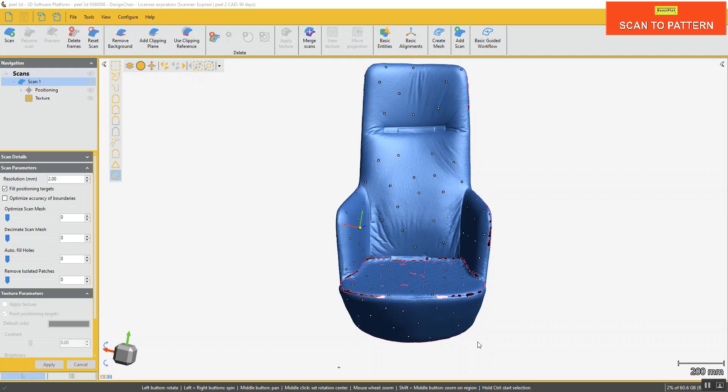Welcome to this video in which I'm going to show you how to take a scan from your peel scanner, send it over to your peel 2 CAD software, and then send that information over to your ExactFlat software.

So first of all, I have my scan here, but before I send it over to peel to CAD, I'm going to decimate my scan mesh, which is going to allow the smaller triangles to become larger in the areas where I don't need as much detail. In other words, the triangles are going to be larger and there will be fewer of them, which is going to reduce my file size by a lot.

Okay, so now that it's done, I am ready to send it over to my peel 2 CAD software. In fact, I can even delete my scans and then save this as a different name, underscore P2C for peel to CAD.

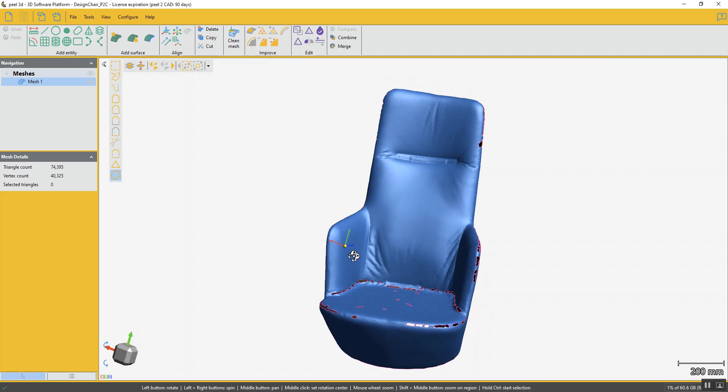Okay, now that I'm in my peel 2 CAD software, I'm going to first clean my mesh. This column is showing me all of the triangles that are affected by different things that I can fix, like spikes, narrow triangles, and creased edges.

If I'm ever not sure what any of these mean, I can click on the help section. The help section is very useful for when you are doing a certain action. Here I'm cleaning the mesh, and right here it is talking about different things on how to clean the mesh.

Okay, so I'll click on apply, and then OK. Next thing I'm going to do is fill in these holes, so I can click on fill holes. It looks like I have 52 holes that I can fill.

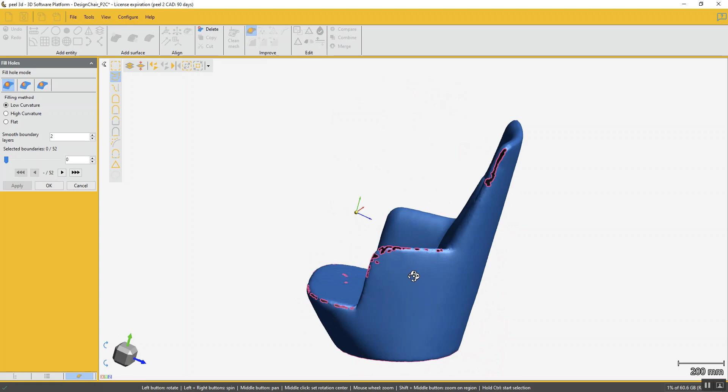Now, if I move the slider bar, it's going to fill in the smaller holes first, and those are indicated by the yellow holes. As I go higher and higher, I'm filling in more and more of the holes. I don't want to fill in the bottom one, because I'm going to be using that later for my alignment. So I'll just click on apply, and then OK.

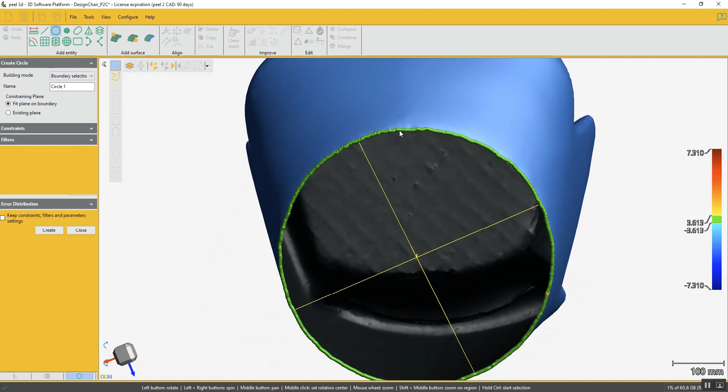All right, next thing I'm going to do is create a circle to use for my alignment. I'm going to use the building mode of boundary selection, and then I just click on the boundary or the edge of the scan, and I click on create.

Next, I click on plane to add my plane. I'm going to use triangle selection for my building mode, and then boundary selection for my selection tool. When I use boundary selection and click on that boundary, it highlights a row of triangles along that boundary, and those are the triangles I'm using to create this plane.

In other words, the circle is going to be on that same plane because that's how I made the circle using the boundary.

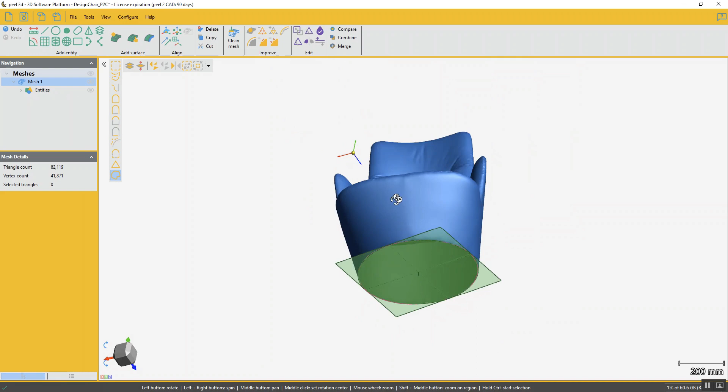All right, next thing I would do is create a line of symmetry or a plane of symmetry. I do that by going to plane, and my building mode this time is going to be mesh symmetry plane.

My options are to either choose plane 1, which doesn't really make sense here, or draw a line or pick 3 vertices. So I will draw a line approximately down the middle, but the software is going to do the rest of the calculations using the rest of my scan.

Okay, so that yellow plane is actually where my symmetry plane would be. I can click on create and then close.

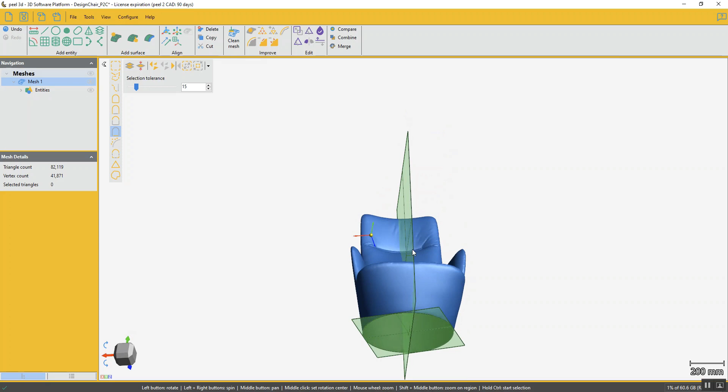All right, so now that I've made my circle and my 2 planes, I'm going to move my origin down to that bottom of the hole, and I do that by clicking on Align to Origin.

And then I restrict different entities. So my circle 1, I'm going to use as my origin XYZ. Then my plane 1, I'm going to use as my plane XY. And lastly, my plane 2, I'm going to constrain to my YZ plane.

Now, as you can see, my part is kind of upside down. I want my Z to be pointing the other way, so I can click on the flip button here under circle 1.

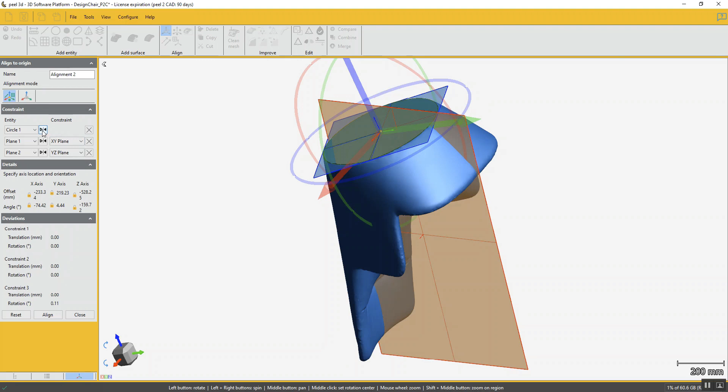Oh, and I can't actually, because that's the origin XYZ, but I can click my XY plane to flip that. And then my plane 2 to flip it the other way as well.

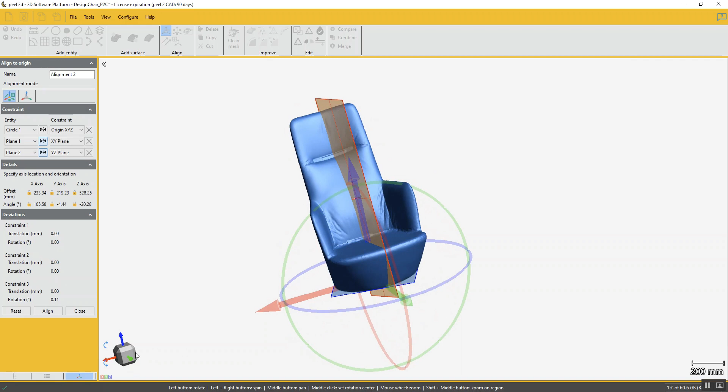Okay, so now at this point I can use my cube to be able to see different points of view, and that's going to be really useful for when I'm cleaning.

Alright, so at this point I'm ready to start cleaning my mesh a lot more. There are certain things that I know for sure I want to clean up, like I don't want this little indentation here. So I can use my rectangular selection, hold down the Control key, and click and drag. And then I click on Defeature. So that smooths that out there.

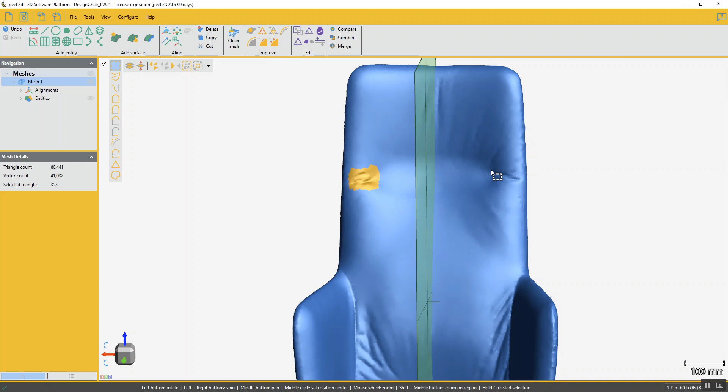But I still have little wrinkles here and there that I want to fix. So I can go bit by bit highlighting them everywhere. But keep in mind that the larger ones that you highlight, there's going to be a little bit more issues with taking a little bit more time. So you want to do them bit by bit.

Also, I don't know if you saw when I clicked on Defeature, it said irregularities were found within the selected part of the mesh. This is very common, especially when you have a blue triangle still hiding within your selected area. So to fix that, just click on the Grow Selection tool, and then you can shrink it again if you wish to. You click on Defeature again, and it works the second time.

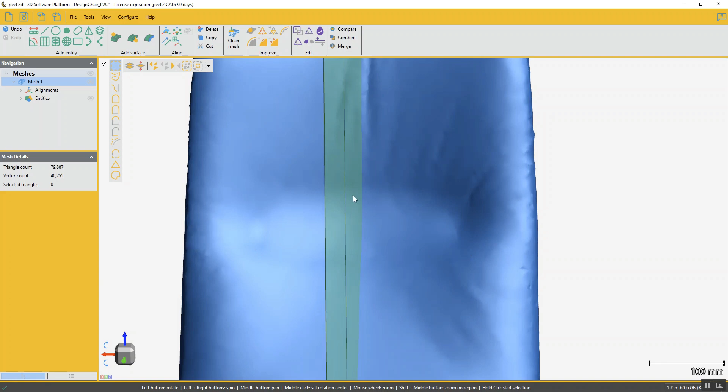So I'm going to go around highlighting different regions, just smoothing everything around here. Now you can either use the paintbrush selection tool, which is what I'm doing right now, or you can use the freeform selection tool.

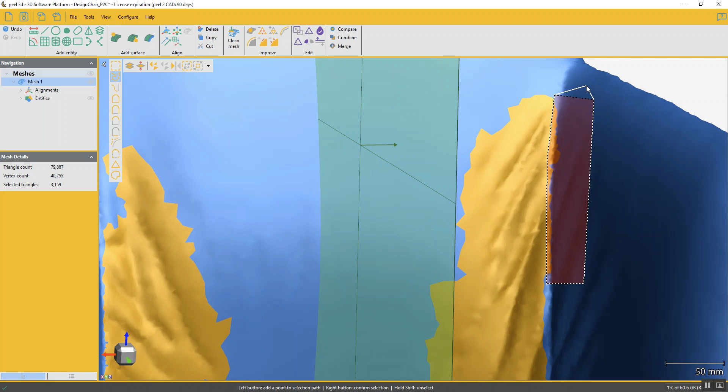I'm going to make sure I don't highlight my corner here, and I do that by hitting Control and Shift at the same time. While holding those down, I do my left click everywhere where I want to unselect. And before I let go of Control Shift, I do a right click. So I can hit Defeature, and it's much smoother there.

Another way to clean things up is by creating holes and then filling them in depending on their form. So in this case, I'm going to use the similar normal tool, and I'll click on this planar area of the bottom seat, and it says unable to create selection with current vertex. In order to allow it to select that region, I'm going to raise my tolerance up, and then it's selecting this region. The reason it wasn't selecting before was because it didn't consider it very planar-like until I eased the tolerance.

I still have some blue regions here that I'm also going to want to delete, so I can just grow that selection, and maybe just a few more just to make sure, and then I can shrink them back down.

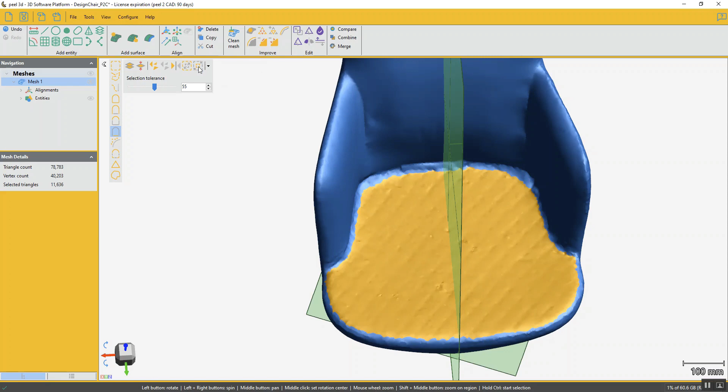Now in this case, I kind of just want to select the flat region, but I do even want to select it all the way back to the edge here. So for that, I'm going to use my freeform selection tool and highlight a little bit more around here. And it looks like I highlighted too much. I hit Control and Shift and just deselect once again. Right click.

And now I'm ready to delete. I can also hit delete on my keyboard as well.

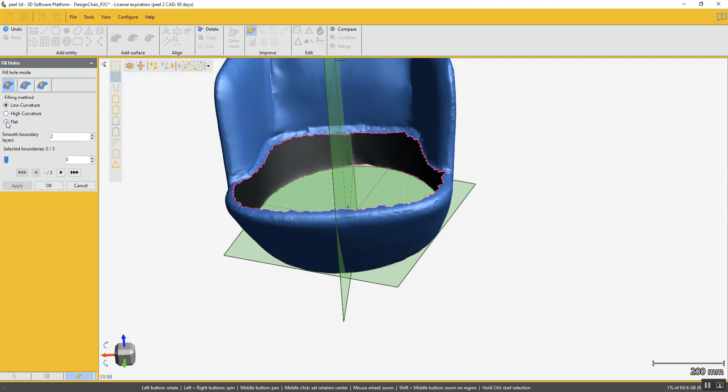So if I want to fill that hole, I can either do it with low curvature, high curvature, or flat method. I'm going to choose flat since I do want this to be pretty flat there. And I click there. And it gave me a smooth boundary layer of two layers, which means that there's about 2 rows of triangles in which it blends in. But I actually don't want to do that, so I'm going to hit undo. And then I'm going to go to 0 here. You can play around with that number and see which one fits your need best.

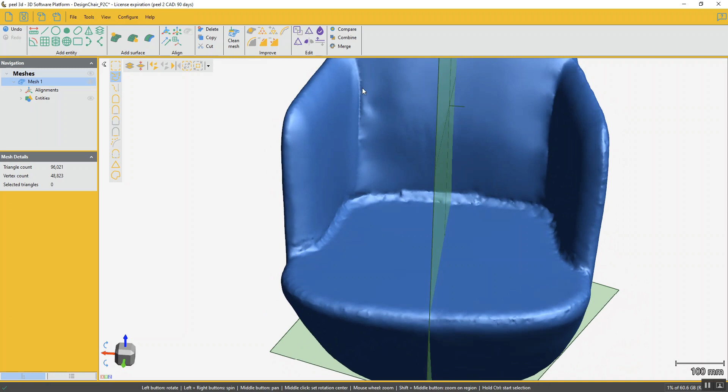So now I'm ready to clean up a little bit more around the corners here, because when I cut these pieces into different fabrics, I'm going to want to make sure that I have a nice smooth cut right along here. But as you can tell, it's a little bit wrinkly.

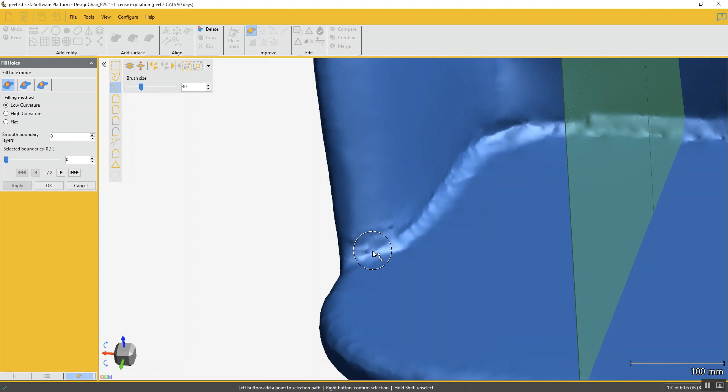So in order to fix that, I can go to my Fill Holes tool. And even while I'm in Fill Holes tool, I can still select certain regions. So I'll use my paintbrush selection tool. And holding down the Control key and scrolling up increases the size of my paintbrush. So I bring it to a size that makes a little bit of sense there. And then I highlight the regions that I'm about to delete.

If at any point this plane gets in the way, or you don't want to see it anymore, you can click on your project tree, the drop-down arrow for entities, and then hide your plane 1, plane 2, and circle 1. You can also hide them or show them all by clicking the entities' eye.

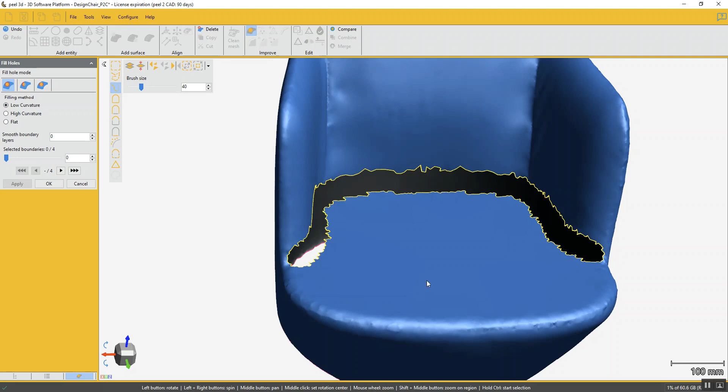Okay, so going back to my filling holes tool, I can click on delete, and then I'll use low curvature to fill in this hole. So there it's much smoother than before, with a little bit of stuff I can still fix.

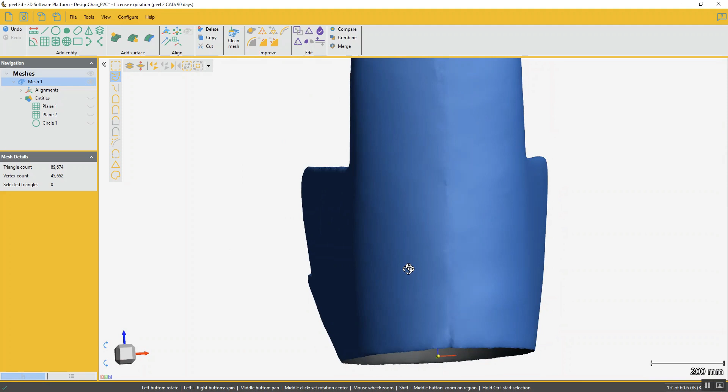So I can keep on going around and doing a bunch of more defeature tools. I'll use my freeform selection for that. And I want to make sure that I do the same thing for the zipper in the back.

Now notice when I do these defeatures, I'm trying not to make them super giant. And that's because with the larger of a defeature selection you've made, the longer you're going to be waiting.

It's a little hard to see, but there is a little seam that was here as well, so I'll defeature that too.

And it's starting to look pretty smooth now.

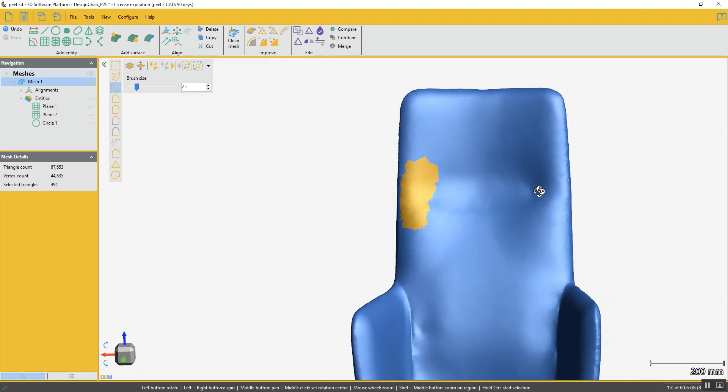Now I do know that I'm going to also want to smooth out right along here because that's where I'm going to cut part of my cloth. So I can either choose Defeature or Fill Holes. You can play with each one and decide how you want to do it.

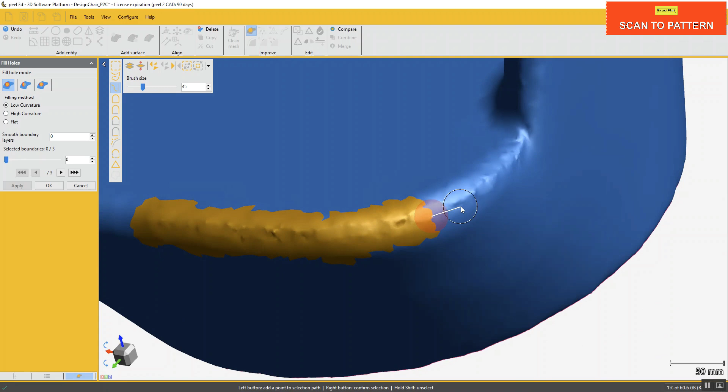Let's say that you're in the middle of clicking with your paintbrush selection tool and you realize you don't want it to be that thick and you want it thinner. You can actually hold down your control key and scroll down on your mouse, and it makes the paintbrush thinner there.

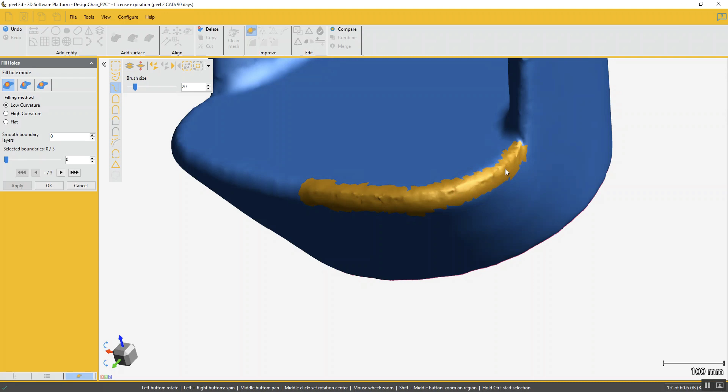So the rest of the stuff I think I'm going to do with the Defeature tool.

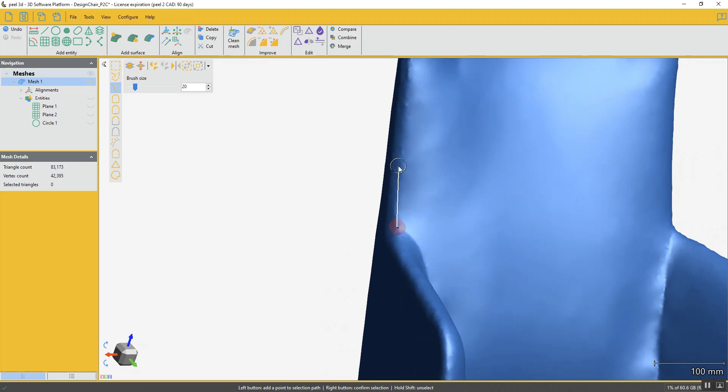Now, if at any point you think that you've lost some information, you can always click on Undo and then try your hand at it again.

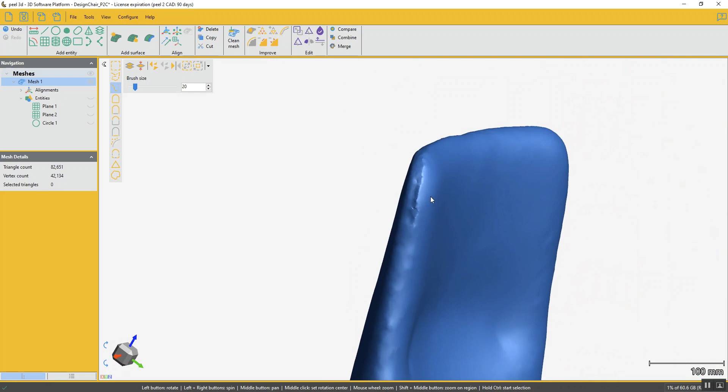And if you're not sure, you can also do this tool called Compare, and you can do Compare to before Defeature. So you can see by how much it's varying.

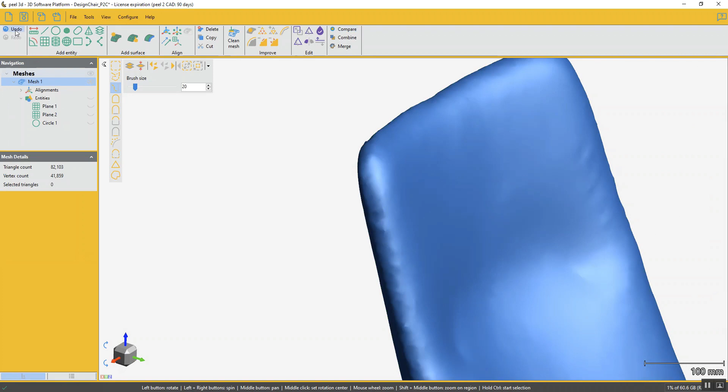This blue represents a negative number, and it's showing that you have less material, or negative material, than what you used to have before. So if you feel like that number is a little too high, you can close it and click on Undo, and then just fix your size again.

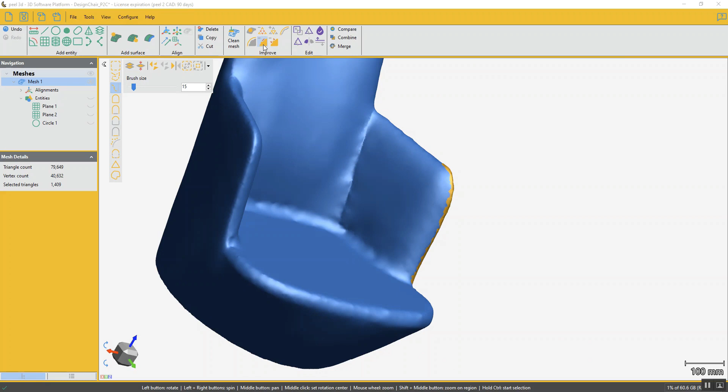Looks pretty smooth now. Just be sure that wherever you're going to put your seam has been defeatured and is nice and smooth.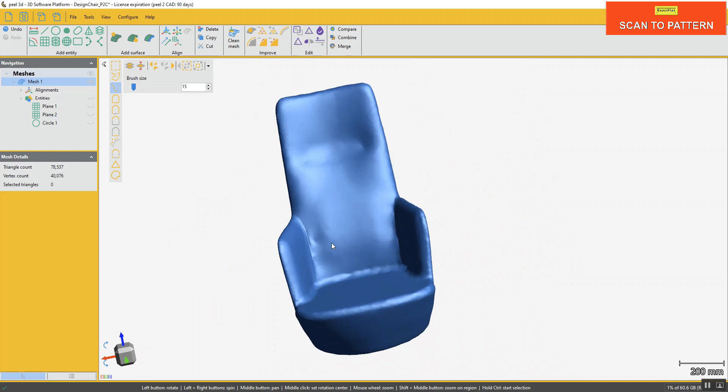All right, looks like we're still missing some smoothness here. And here.

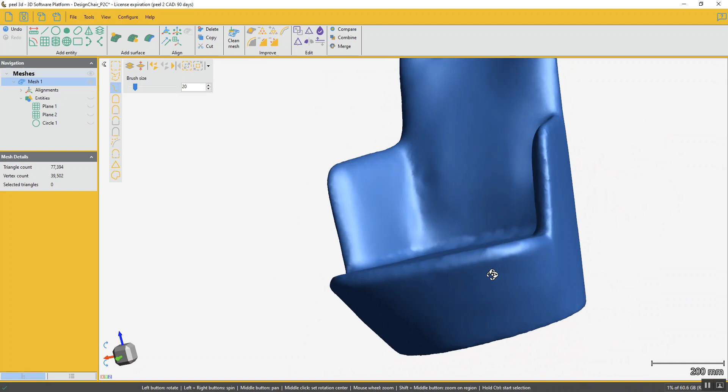Okay, looks pretty good. At this point, we can also do a smooth mesh.

So I'll go all the way up to 100. I'll allow my max deviation to be 0.1 millimeters. And just to better see what's going on, I can click on triangles and wireframe on my display. The deviation might be so slight we might not even see it, so let's see what happens here.

We'll click on Preserve Boundary, and we'll click on Apply. So it was either already smooth, or maybe I already did it and didn't remember.

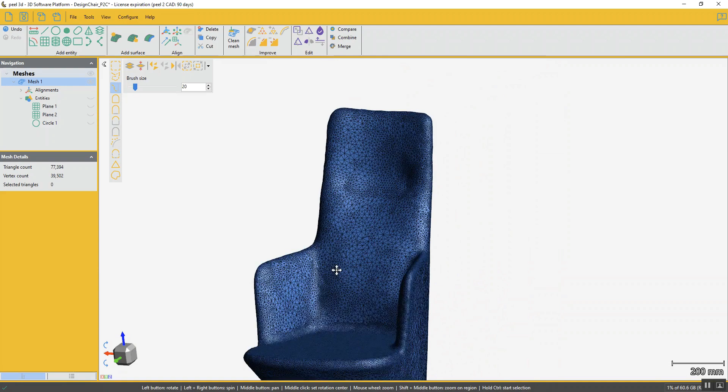Also, I know that I'm going to want to make this boundary at the bottom nice and smooth, and I know it's pretty circular, so I can actually edit it so that it becomes a perfect circle. I can do that by clicking on Edit Boundary, and then choosing Fit to Entity.

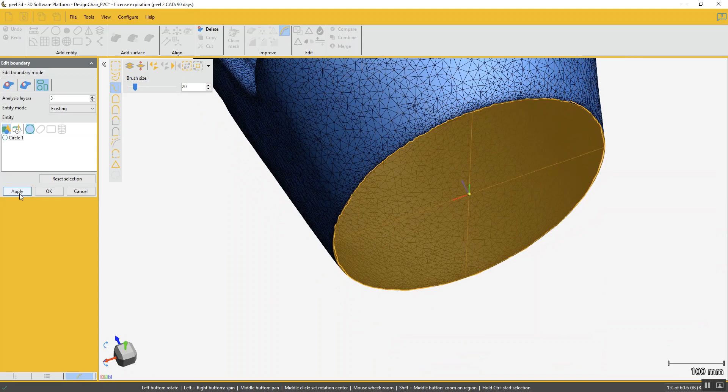And either I can use this boundary as my circle, or if I've already made a circle before, I can choose that circle to make my entity or my boundary fit to that entity. So if I click on Apply, then that circle or that boundary becomes a nice smooth circle.

Okay, so now that I've smoothed a lot of things out here, what I'm going to do is, well, first off, I can see that I have about 75,000 triangles, which is a good amount of triangles for my ExactFlat software. So at this point, I can start cutting my chair.

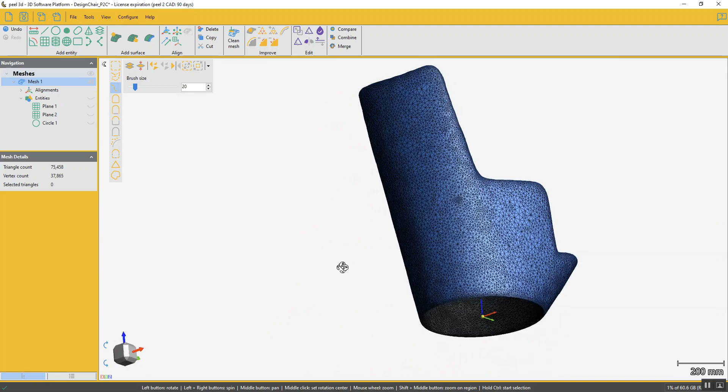So since everything's pretty smooth, I don't see any more spots where I can clean up. Then I'm ready to start cutting the pieces.

Now, whenever I do something that's pretty drastic, like cutting pieces apart, I usually like to right-click and duplicate my mesh so that I still have an original to work off of in case I make a mistake within my duplicate.

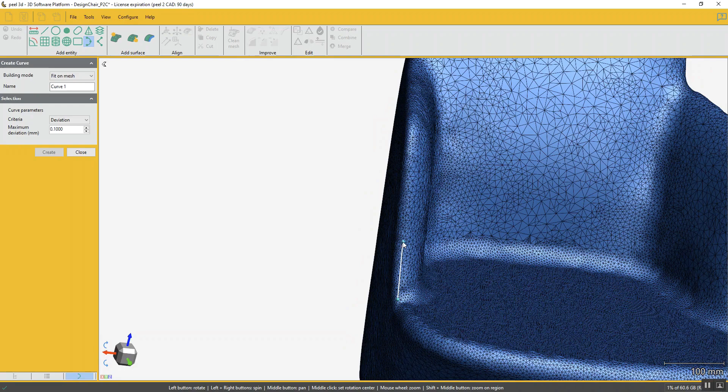So I'll start working on this duplicate, and in order to do that, I'm going to have to create some curves to separate the different pieces. So first I'll go to create a curve, and I'll just start clicking along where this curve should be.

Whenever I'm coming around the corner, I like to put a few more dots on there. And if I ever feel like I'm actually straying a little too far, I can click on any of these dots and move them back or forward wherever they need to go.

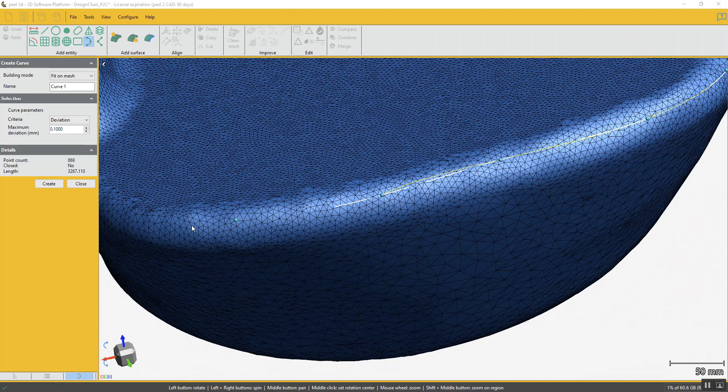Okay, since I've already aligned my part, I can click on my cube to see if things look evenly from one side to the other. So if I feel like maybe one side is a little too far, I can adjust everything.

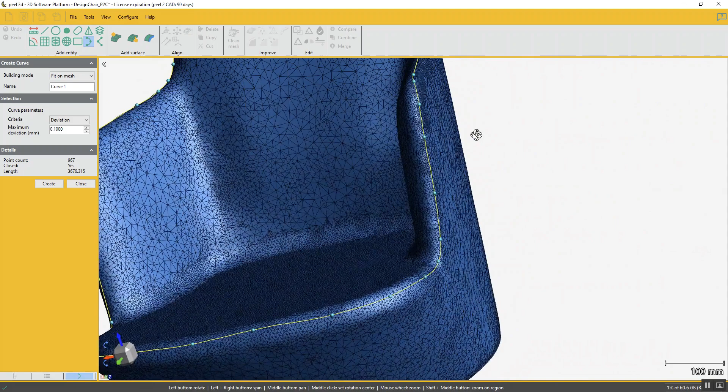Or maybe if something's a little too far on the other side, I can adjust it as well. Oops.

Okay, so everything looks pretty even now. I can click on Create now.

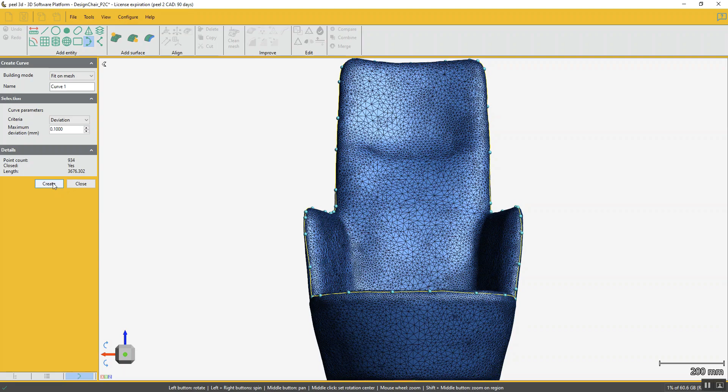If I do want there to be an allowable deviation as well, I can increase my maximum deviation allowance too. So instead of it fitting exactly onto the mesh, I could say I want a deviation of 0.5 millimeters, and that mesh will become a little bit smoother. So I'll put maybe 1 millimeter there, and now my mesh is smoother there on those parts of the curves.

I can click on Create and then Close.

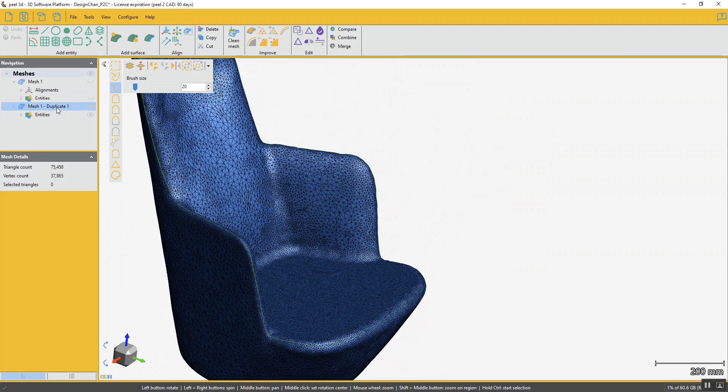So now I have one curve that splits the top part away from the bottom part, but I haven't just split it yet. I have to click on Cut Mesh by Curve, choose Curve 1, and say keep both parts, the top and the bottom. Click on Apply and then OK.

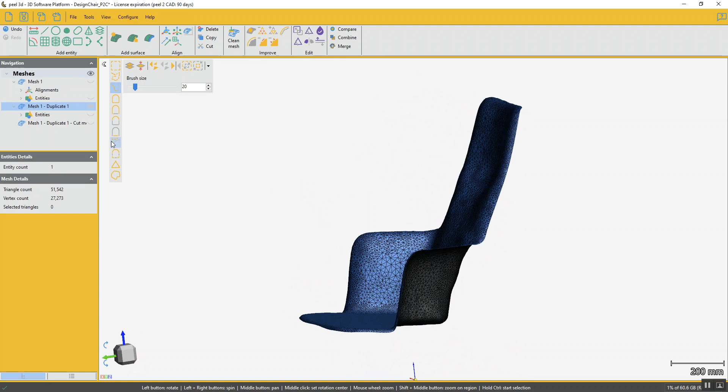And now I have my Mesh 1 Duplicate 1, and my Mesh 1 Duplicate 1 Cut Mesh by Curve. So just to make things a little bit easier, I'm going to call this one Top, and I'm going to call this one Bottom.

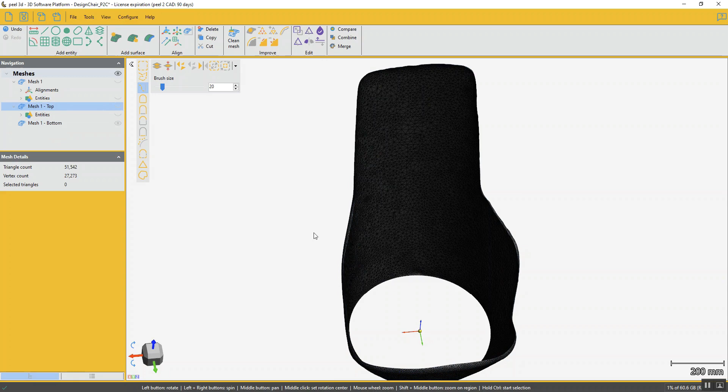So I can continue working from my top section. The way you know you're working on something is it'll be in blue on your screen. If you have the eye closed, you won't be able to see it, and you might even see something else instead. So even though I'm working on Mesh 1 top, I can't see it because my eye is closed, and I only see Mesh 1 bottom, even though it's not active. If I were to try to delete something here, it wouldn't let me - it would only bring it back to Mesh 1 top.

So I'll clear the selection there, and then I'll start cutting what I need to do here. Now, even though I've smoothed this top part out, I can still decimate some of my triangles there because this is a planar area.

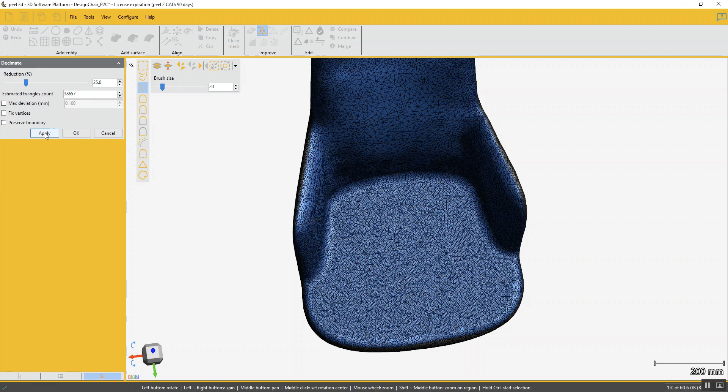So I'm going to click on Decimate, and right now it says 38,000. I'm going to just choose Apply to see what it does. And so it decreases the number of triangles there. I actually don't want to do that because I also wanted to keep my boundary preserved.

So let me hide this and show you exactly what I mean. When I click on Decimate, I have the option of preserving my boundary - in other words, this curve is not going to change, that cut area right there.

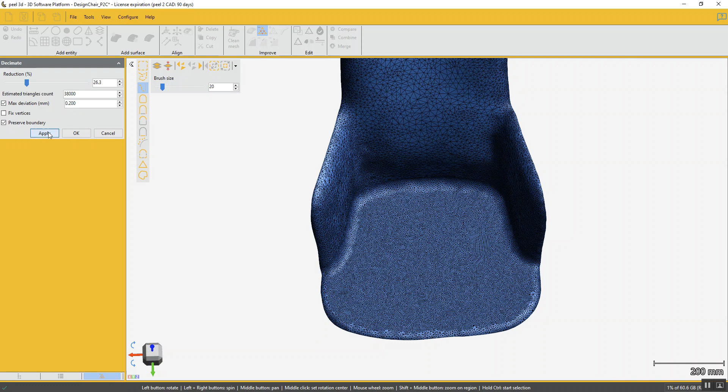So I also know that I want my max deviation to not change by too much, so I can leave it at 0.1, or change it if I'm willing to - so 0.2, something like that. And I can say 38,000 triangles, apply, and now I have larger triangles in this region. And then OK.

Okay, continuing on, I can keep cutting this chair into different pieces. I am going to click on the outermost edge of where this corner should be, and then click along where I want my seam to go.

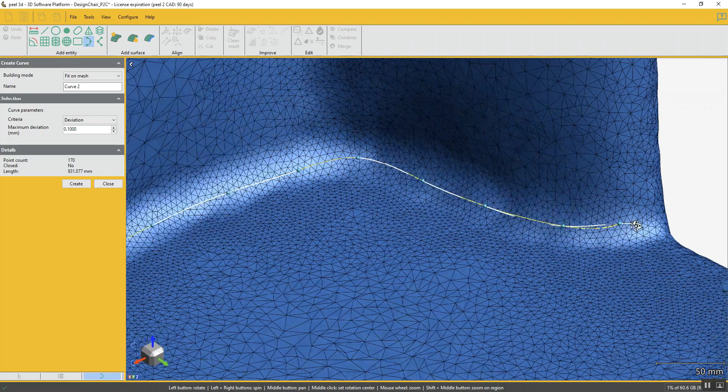Now remember when I defeatured this, I did get rid of some detail, and that's okay, because we really just want the cloth where it's going to be, and we want this area to be smooth as well. So I'll choose 0.5 millimeter - or actually we went with 1 previously, so we'll stick with 1 there - and then we'll create the curve.

Close it. I'll cut the mesh by curve using my curve 2 that I just made, and I'm once again going to keep both parts. Click on apply and OK. So now my mesh 1 top is not just my mesh 1 top, but it's also my seat section.

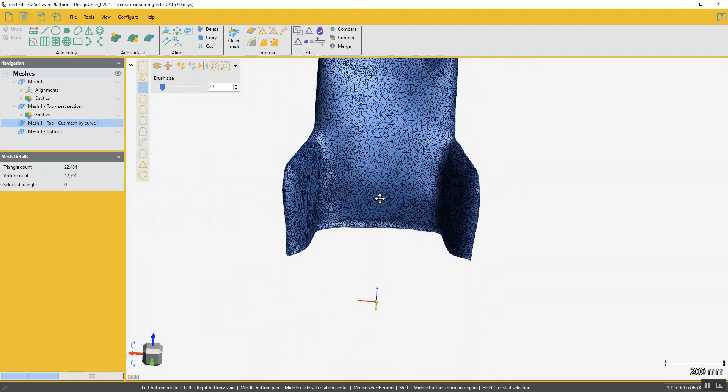Hide that, and I'll work on this top part. I'm going to separate the two different arms. So here, I'm going to make another curve, and separate that curve right along where the seam would go. Create, close, and cut.

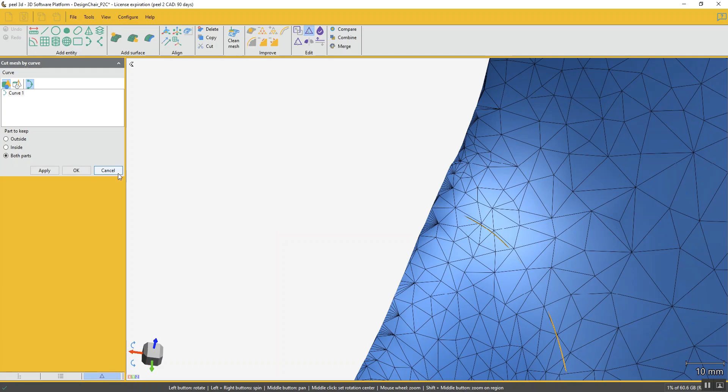Keep both parts. It looks like something I did with the curve - I might not have gone all the way to the end, or I might have made it a little too jagged or too smooth. So I can go back, delete that curve, and create it again.

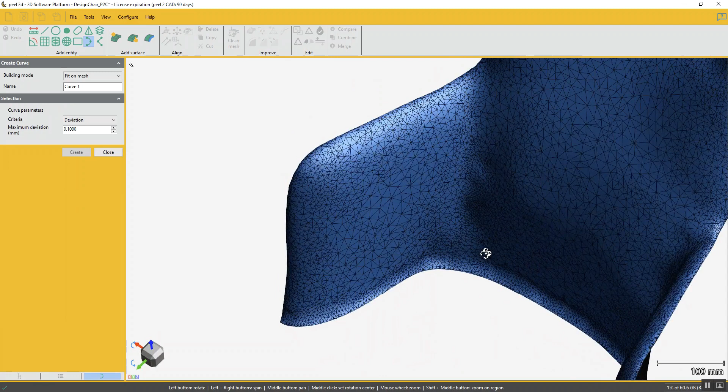This time I'll put 0.5 millimeter, create it, close, and cut. I do want to keep both parts. I apply and OK. So now this one will be called my right arm section.

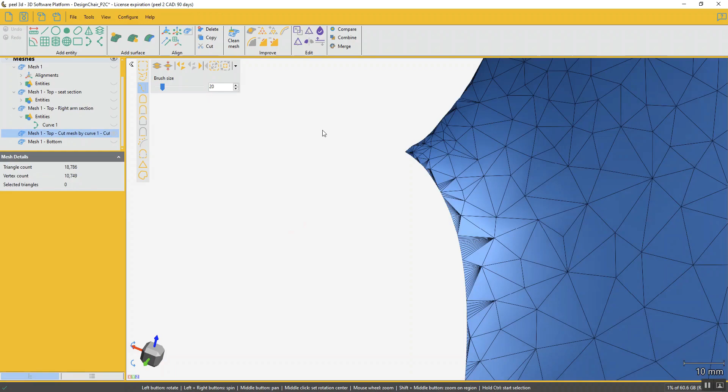And this one is ready to be split into two as well. Now, if I want it to be pretty similar to the other side, I should look at this section here and figure out if I'm pretty close or not. Make sure I get all the way to the edge. Looks pretty good.

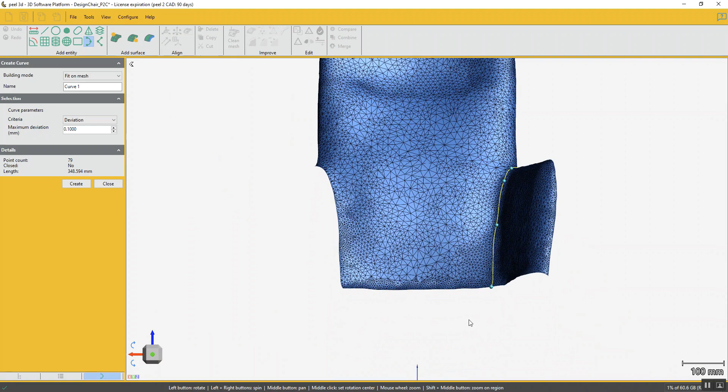0.5, create, close. Keep both parts. And now I can rename this one left arm section.

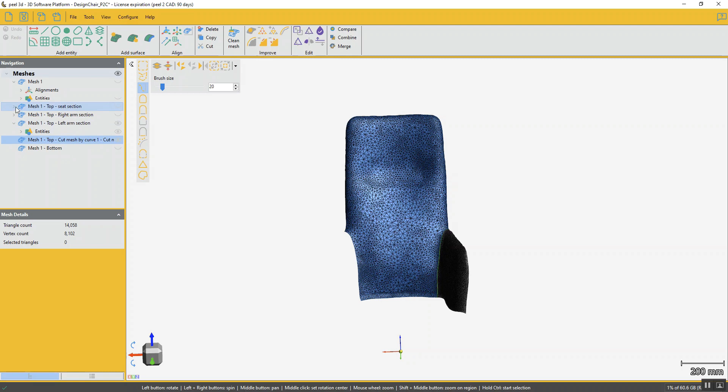Lastly, I have this one to cut. And if you remember correctly, I actually already made a symmetry plane, so I can use that same plane to cut this mesh. But since I created that plane in a different mesh, I'm going to have to copy that plane over to my mesh 1 top section. So I go looking for it, and it was my plane 2 in this one. Then I right click and choose send to this mesh.

Now that I've sent it there, I'm going to be able to cut it in half, because now I have it here. I'm going to do that by clicking on cut mesh, using plane 2. I'm going to keep both parts and just preview where it's going to cut - right down there, that's good. And then OK. So now I can look at this one, which is my mesh 1 top, and I'm going to rename this mesh 1 top left side.

And this one's going to be my... oops, I forgot to erase the cut mesh by curve section part. And then mesh 1 top, right side.

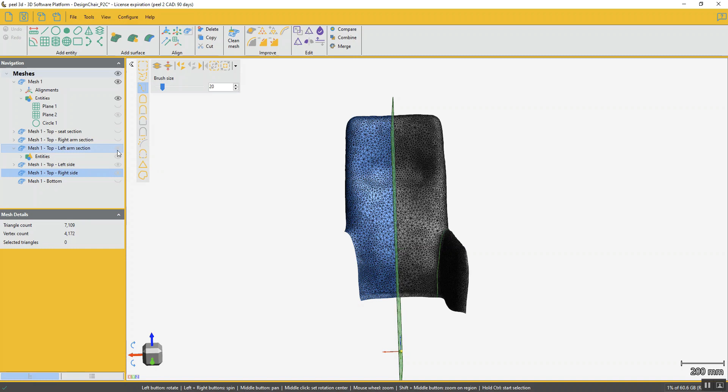I still want to cut this one down the middle. I'll bring it down to a good view, and then I'll create a plane using my draw line plane creation mode. I hold down Control and just draw a line right across, then click Create and Close.

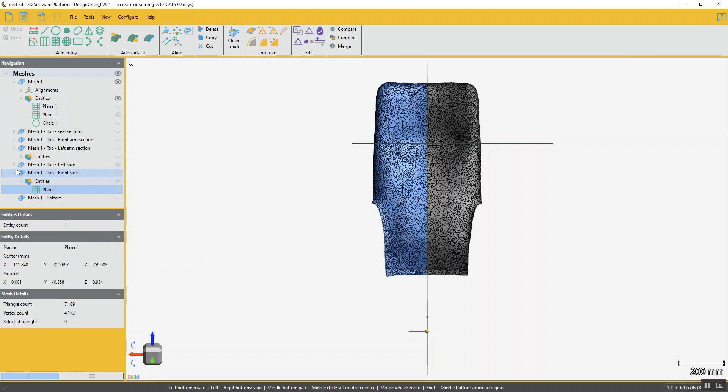Now I also want this same plane to go over to my top left side. So just so I don't forget to do it later, I'm going to send it to my mesh 1 top left side. So now I have it here as well.

So mesh 1 top left side, I'm going to cut it with my plane, I mean plane 1, keep both parts, and OK. I can rename this left bottom side, and rename this one left top side.

It's a lot easier to work with things when you know which one you're looking at. So mesh 1 top right side, that's this one here. We're going to cut that one with the plane as well. Right top side, right bottom side. Okay, that section is done.

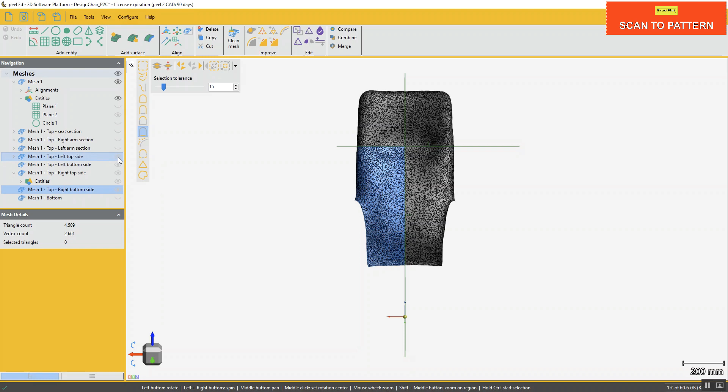Now I can look at mesh 1 bottom. Remember I had that symmetry plane, and I can use that to cut my mesh, so I'll use the cut mesh tool there. And I don't have that plane yet, so I'll have to bring it over. I'm seeing it here. Send to mesh 1 bottom, and then I can close that eye.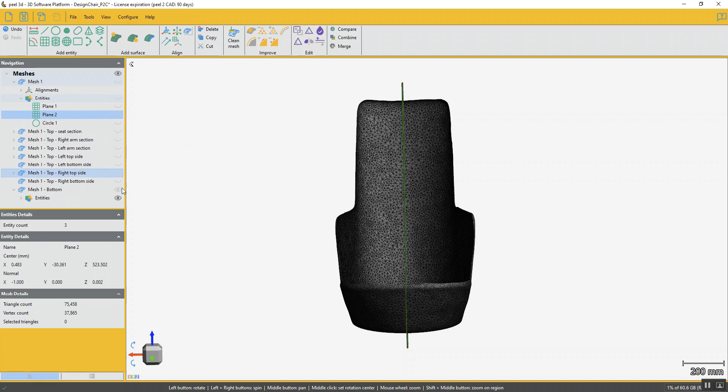And under mesh 1 bottom, I can now cut it with my plane 2. Keep both parts. Mesh 1 bottom left, mesh 1 bottom right.

I still have one more cut to go, and that's going to be right down here, one line right here. And I know that since my part is symmetric, the cut that I do from this side can also be done on this side, so I really just have to make one plane to go right down the middle. Now instead of trying to get it perfect and make it aligned, I can also click on my cube, and I know that it's looking at it straight away.

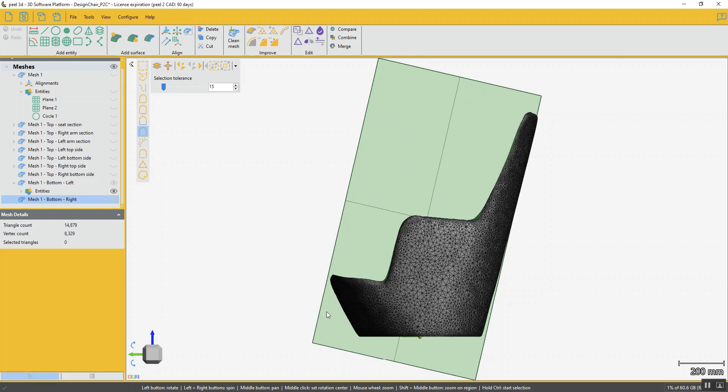So let's look at our mesh 1 bottom left. We can draw a plane line and click from here down to here while holding Control. I click Create and then Close. That was my plane 1, and I can forward that over to my mesh 1 bottom right.

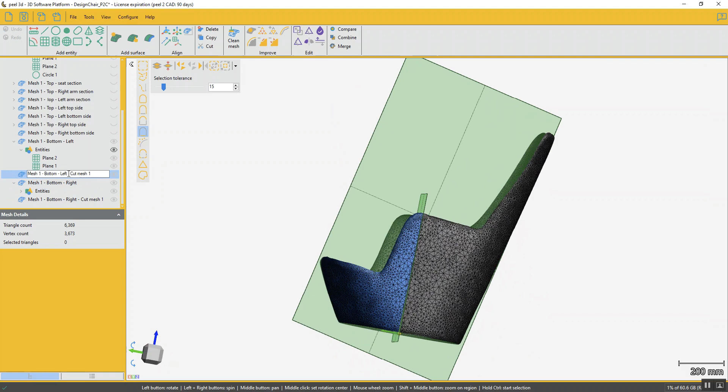I'm going to cut the mesh with the plane. Keep both parts, preview it, yep. And then the same thing goes for the bottom right side. I can call this left front, right back, right front, and left back.

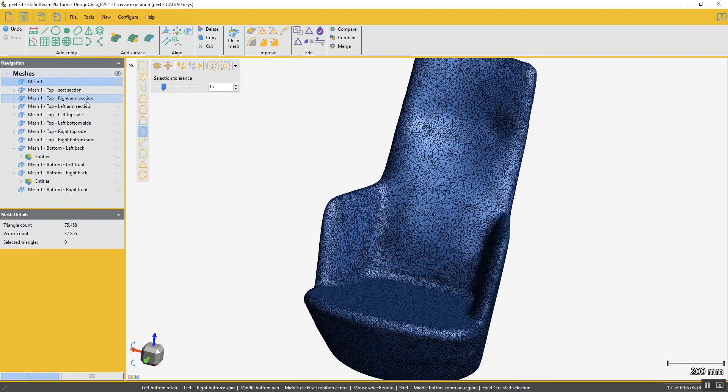So at this point I have my original. If I hold Control E, or I can also right click, Show Only Selected, I'll only see that one item and nothing else. So this is what I started with once I had finished cleaning it up.

And then the next thing was my seat, my two arms, my back pieces, my all around the edges pieces. So I can show them all here. Now I can either export them all one by one, but that kind of takes a long time.

So what I can also do, instead of exporting them all piece by piece, which is something like this, click here and then do export mesh. That takes a long time. So instead of doing each one, I'm going to do them all at the same time, and in order to do that, I'm going to select all of these and combine them together with the Combine tool.

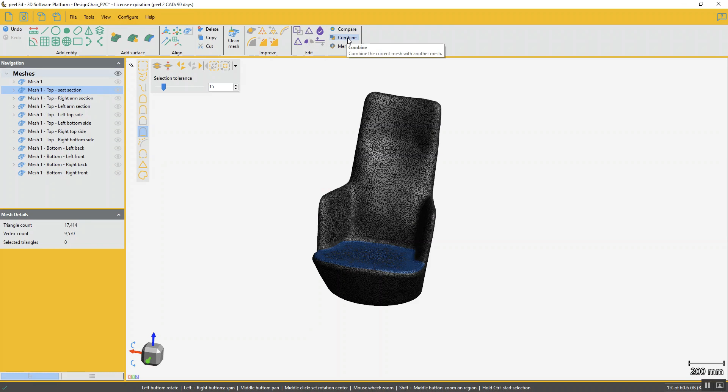So I select every item I want to be placed together, make sure I don't miss any. And then I click Apply and OK. And now there's a new thing in town called Combine 1.

And although it looks like it's all together, it is still, in a way, separate. So that when I export it, I can save it as my OBJ, and then I can say Combined Design Chair.

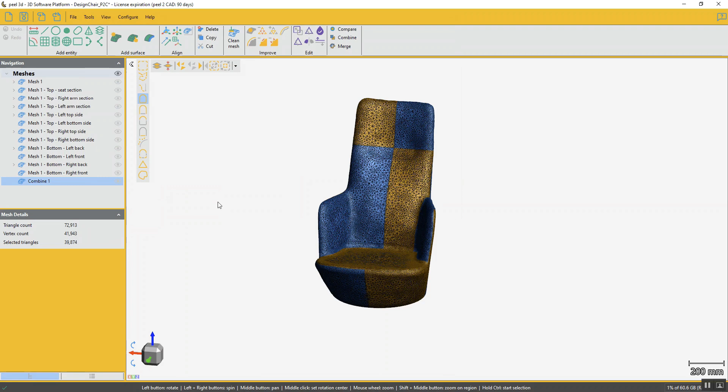And from there on out, I can send that into my ExactFlat software to be able to separate all the different pieces. Thank you for watching.